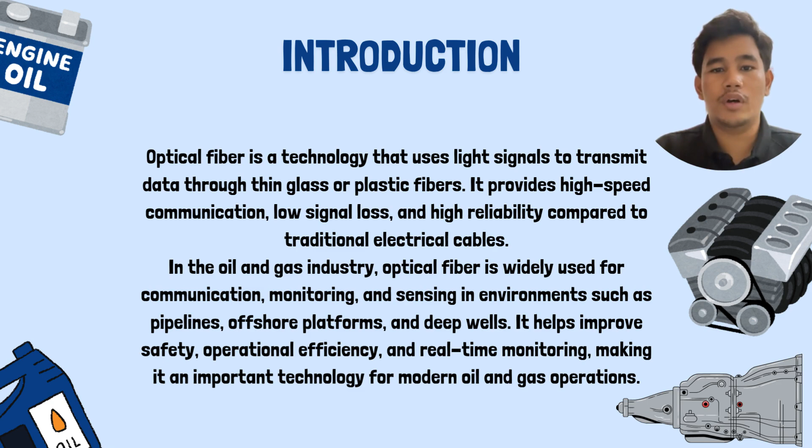Optical fiber is a technology that uses light signals to transmit data through thin glass or plastic fibers. It provides high-speed communication, low signal loss, and high reliability compared to traditional electrical cables. In the oil and gas industry, optical fiber is widely used for communication, monitoring, and sensing in environments such as pipelines, offshore platforms, and deep wells. It helps improve safety, operational efficiency, and real-time monitoring, making it an important technology for modern oil and gas operations.

Okay, for this part, let us see what is the principle of optical fiber. In physics, it operates on the scientific principle of TIR. So what is TIR? TIR is total internal reflection.

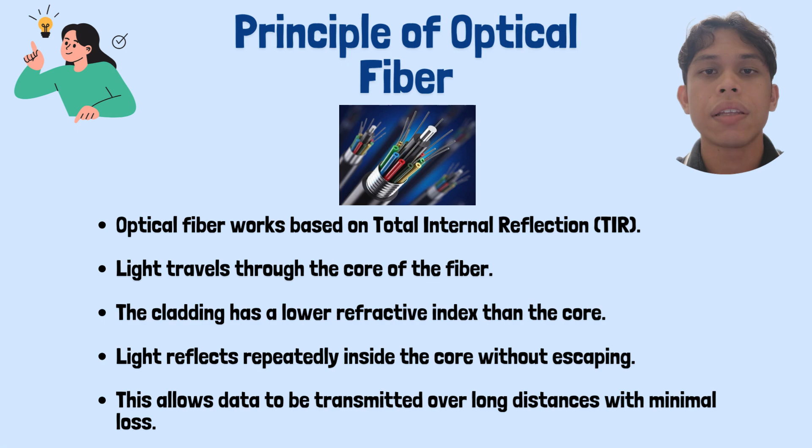Now let us see how light travels in core versus cladding. Light travels strictly through the core, kept inside because the surrounding cladding layer has a lower refractive index. This is called repeated reflection, where light bounces repeatedly within the core without escaping, which allows data to travel over immense distances with minimal signal loss. That's the definition of the principle of optical fiber.

Hello everyone, moving on to the technical composition of our topic, let's take a look at the physical makeup of an optical fiber. It is fascinating how such a thin string can carry so much data across vast distances. Generally, fiber optics are constructed from silica, which is a highly purified glass or plastic. The choice of material depends on the application, but for high-stakes industries like oil and gas, ultra-pure glass is the standard. As we can see in this diagram, the cable consists of 5 distinct layers, each serving a critical purpose.

First, the core. At the very center is the core. This is the heart of the fiber, made of ultra-pure glass or plastic. This is the actual pathway where light passes, which carries our data.

Second is the cladding. Surrounding the core is the cladding. This layer is vital because it has a lower refractive index than the core. This difference causes a phenomenon called total internal reflection, essentially acting as a mirror that reflects light back into the core so no signal is lost.

Next, we have the coating, often called the buffer. This is a plastic layer that provides a necessary cushion for the fragile core and cladding. It also acts as the first line of defense against moisture.

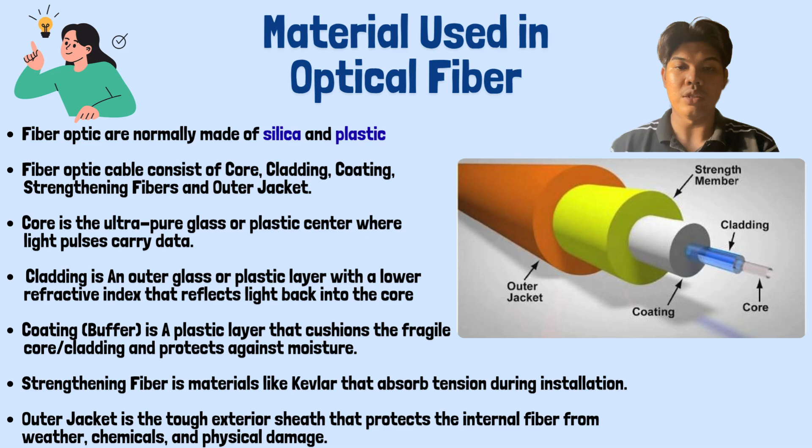And last for this fiber optic is the outer jacket. The outer jacket is the tough exterior shell. It protects the entire internal structure from environmental hazards such as harsh weather, chemicals, and physical impacts.

Now, why do we use this specific material for the oil and gas industry? The theory behind optical fiber sensors allows them to perform tasks that traditional sensors simply cannot handle. In the context of oil and gas, these sensors are deployed to monitor hydrocarbon pipelines over very long distances. Let's break down the theoretical advantages of this technology.

One of the most critical applications is the ability to detect oil and gas leaks at a very early stage. By identifying a leak immediately, operators can prevent catastrophic fire and environmental accidents before they escalate.

Oil and gas wells are among the most difficult environments on Earth. Fiber optic sensors are uniquely qualified for this because they can withstand high temperature and extreme pressure that would destroy standard equipment.

For data integrity, because the system uses light signals for transmission, the data is fast and highly accurate. Perhaps the biggest theoretical advantage is that fiber optic overcomes the limitations of conventional electrical sensors. Electrical sensors can be prone to electromagnetic interference and are more dangerous. They can create sparks, which is a massive risk in a volatile oil and gas environment. Since optical fiber uses light, they are inherently safer.

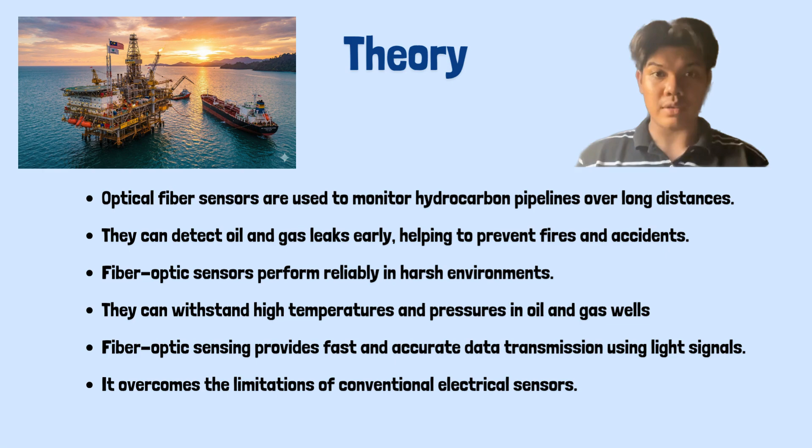Now, I will explain the application of optical fiber technology in the oil and gas industry.

The first application is distributed temperature sensing, or DTS. In this system, optical fibers are used to monitor temperature continuously along pipelines and oil wells. This helps engineers detect leaks, overheating equipment, abnormal heat change, and fire risk at an early stage. As a result, companies can improve safety and reduce maintenance costs.

The second application is distributed acoustic sensing, also known as DAS. Optical fiber can detect sound waves and vibration along pipelines and drilling areas. This technology is used for leak detection, pipeline security monitoring, and monitoring drilling activities. It allows operators to identify problems quickly and respond faster during emergencies.

Another important application is downhole monitoring. Optical fiber sensors are installed deep inside oil wells to measure pressure, temperature, and flow rate in real time. The information collected helps engineers improve oil extraction efficiency and reduce operational risk.

Besides monitoring, optical fibers are also used in communication systems. In offshore platforms and refineries, optical fiber provides high-speed data transmission with low signal loss. They are also resistant to electromagnetic interference, making communication more reliable between control rooms and field equipment.

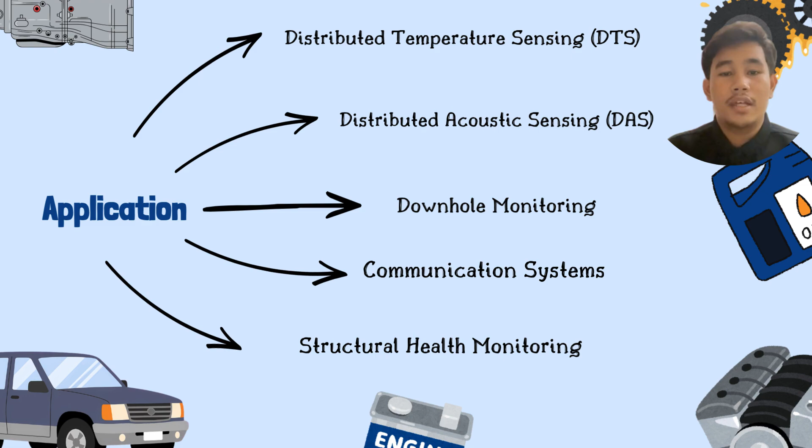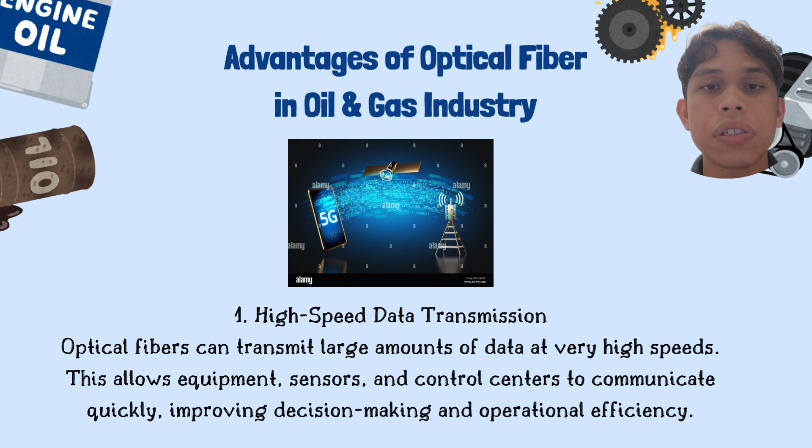Now, let us see what are the advantages of optical fiber in the oil and gas industry. The first advantage is high-speed data transmission, where optical fibers can transmit large amounts of data at very high speeds, and this can help operations run efficiently.

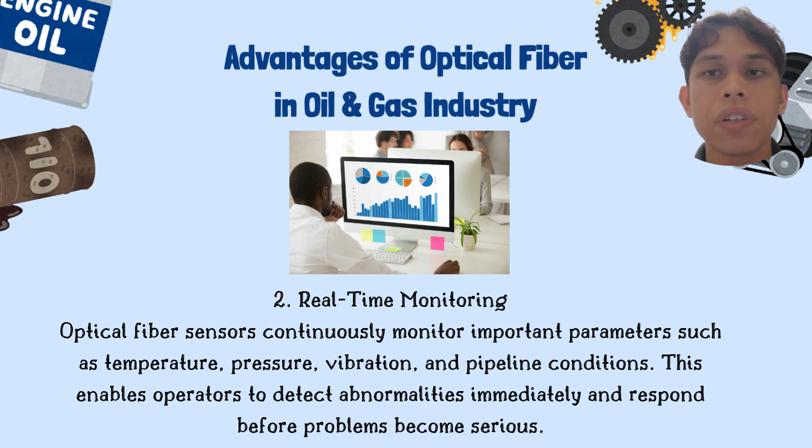The second advantage is real-time monitoring, where optical fiber sensors continuously monitor important parameters such as temperature, pressure, vibration, and pipeline condition, helping operators monitor conditions carefully and in detail.

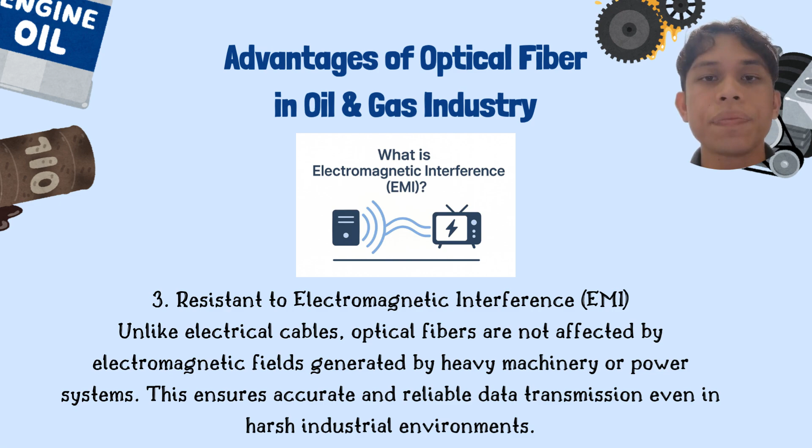The third advantage of optical fiber is that it is resistant to electromagnetic interference, or EMI. Unlike electric cables, optical fibers are not affected by EMI from heavy machinery or power systems, which ensures that all the data collected is correct and reliable.

Although optical fiber technology provides many advantages in the oil and gas industry, there are also several challenges and limitations. The first challenge is the high installation cost. Fiber optic systems require specialized equipment, advanced monitoring systems, and skilled technicians. Because of this, the initial setup cost is more expensive compared to conventional sensors and communication systems.

The second challenge is the fragility of optical fibers. Optical fibers are thin and delicate, so they can be easily damaged by excessive bending, mechanical stress, or harsh drilling operations. If the fiber is damaged, data transmission may be interrupted.

Another limitation is difficult maintenance. In offshore platforms or deep underground wells, repairing damaged optical fiber is complicated, time-consuming, and costly. Sometimes operations need to be stopped during the repair process.

In addition, the oil and gas industry operates in extreme environments with high temperature, high pressure, and corrosive chemicals. This harsh condition can affect the performance and lifespan of optical fiber sensors. Lastly, fiber optic systems generate a large amount of data. Advanced software and trained experts are needed to analyze and interpret data accurately, which can increase operational complexity.

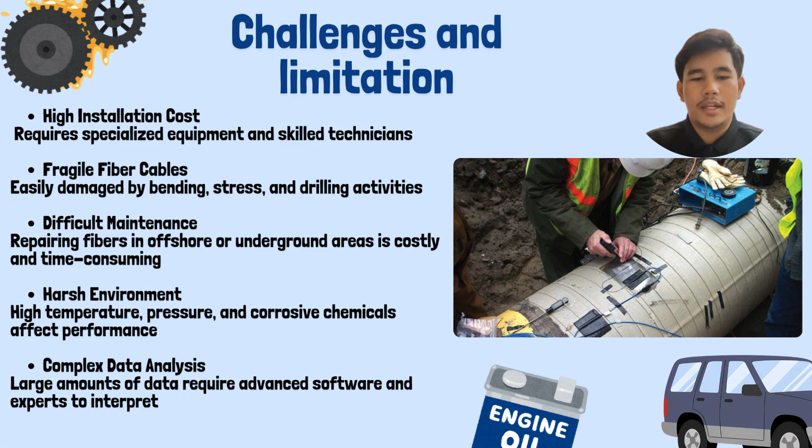Therefore, despite its many benefits, optical fiber technology still faces several technical and economic challenges in the oil and gas industry.

Optical fiber technology has become an important part of the oil and gas industry due to its ability to provide accurate monitoring, high-speed communication, and improved safety. Applications such as temperature sensing, acoustic monitoring, downhole sensing, and structural monitoring help companies increase operational efficiency and reduce risk. However, the technology also faces several challenges, including high installation costs, difficult maintenance, and harsh environment conditions.

Despite these limitations, continuous advancement in fiber optic technology is making the system more reliable and cost-effective. Overall, optical fiber technology plays a major role in modernizing the oil and gas industry and will continue to support safer and more efficient industrial operations in the future. Thank you.